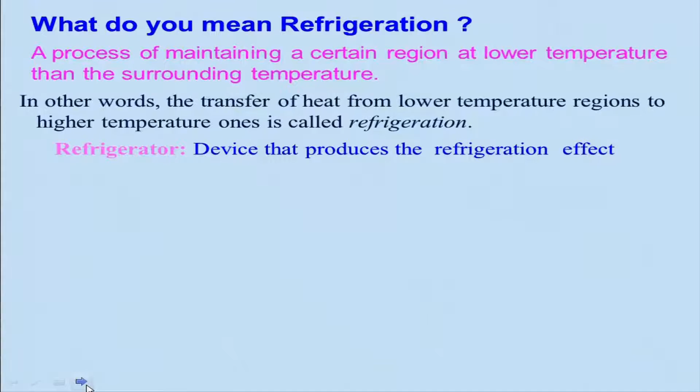In other words, basically what is being done here, the heat is being transferred from the lower temperature region to the higher temperature region. Of course, you need to provide some amount of work, and when we do that, we call it as refrigeration. Basically, if you look at a refrigerator, it is a device that produces the refrigeration effect or the cooling effect, you can say that way.

And air conditioning is a little different. It is not only producing the cooling effect, but it also conditions the air, meaning the quality of the air has to be controlled. So we will be discussing about basically the refrigeration cycle, the cycle which is used for analyzing or for the refrigeration system. We call it a refrigeration cycle. In other words, basically the refrigeration system operates on this cycle, right?

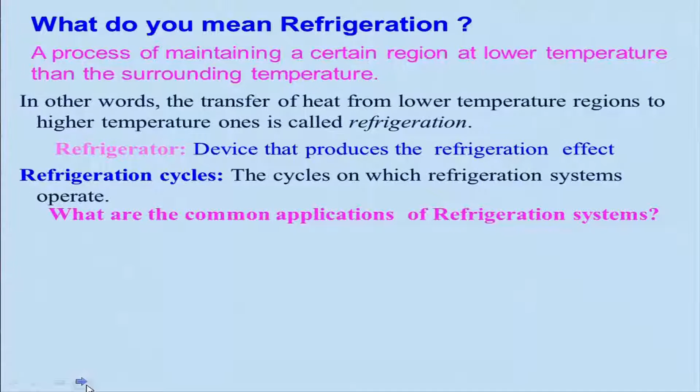So if you look at what are the common applications of refrigeration systems, as I told you, the air conditioning systems and refrigerators we use for cooling the food and other materials which easily get spoiled, and other things we use in factories. You might have seen on the way to our academic campus that there is a liquid nitrogen plant and liquid hydrogen plant. They also use the refrigeration system, and I would suggest you go and check what is happening there and what is being covered in the class.

So if you look at the common applications of refrigeration systems, they are refrigerators, air conditioners, heat pumps, and gas separators. We want to separate the gas, let's say from air, I want to separate nitrogen or oxygen. I can go for low temperature, convert into liquid, and then separate. Ice production is a very age-old thing, right? And liquefaction of gases, we do that. For example, we use liquid hydrogen and liquid oxygen in our spacecraft, rocket engines, cryogenic engines. So in several other places we can use that. It's a very important application.

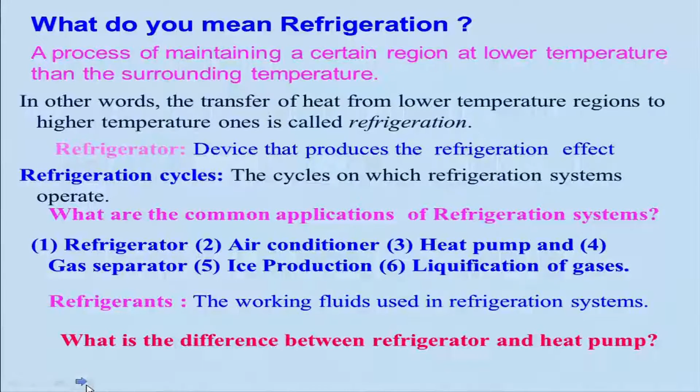So if you look at what is the difference between the refrigerator and heat pump, if you recall, we had already discussed about it. Basically, a refrigerator will be taking the heat from the cold region and giving it to the hot region, whereas it is the other way around for the heat pump. The heat pump will be taking the heat from the cold region and giving it to the hot region, like in winter we use the heat pump.

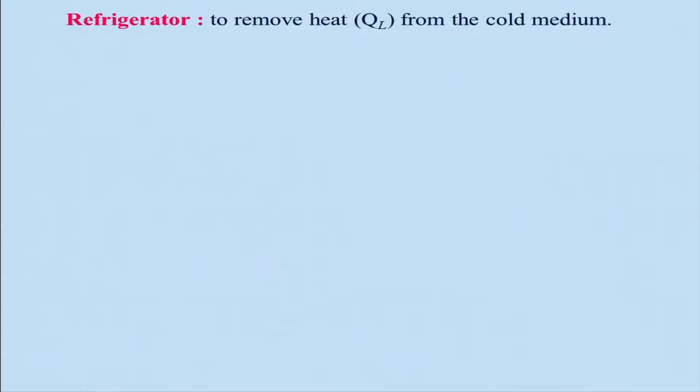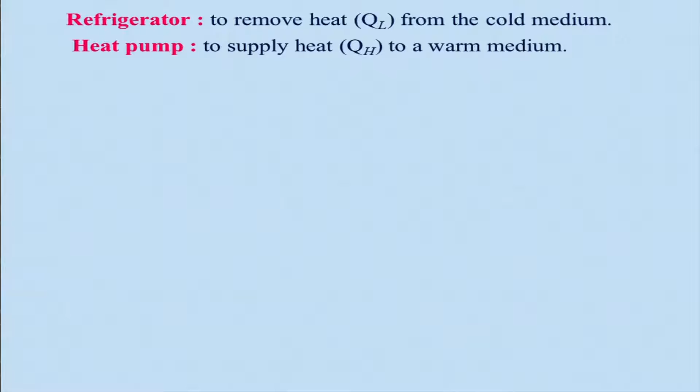As I told you, the refrigerator is basically to remove the heat QL from the cold medium or cold region, and the heat pump is to supply heat to the warm region. Because in winter we use it, and that is warm, we will be giving some heat to the warm region. If you look at this diagram schematically shown here, in the cold region, refrigerated space, we take some amount of heat QL, which is the desired output, then we give some work input, and we reject QH amount to the warm region in case of refrigerator.

Whereas the heat pump is the other way around: it takes a certain amount of heat QL from the cold region, and it supplies the QH amount of heat to the warm region, which needs to be maintained properly in the winter season. And of course, you will have to give some work input to the heat pump.

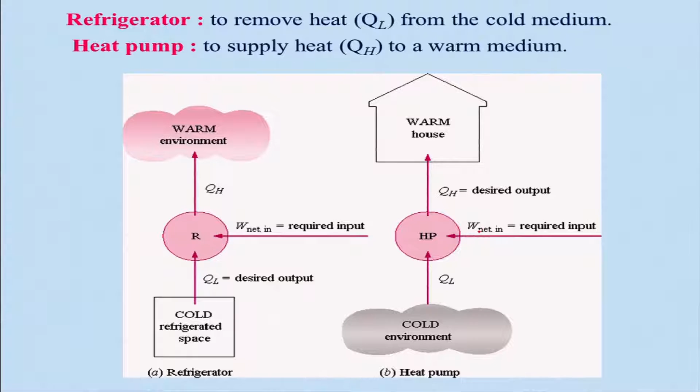How do we characterize the performance of refrigerator and heat pump? In case of the heat engine, we use thermal efficiency, or we can also use the second law efficiency, just to check how good or bad it is, or what are the other scopes for enhancing the thermal efficiency of a heat engine. But in this case, we will be using the coefficient of performance.

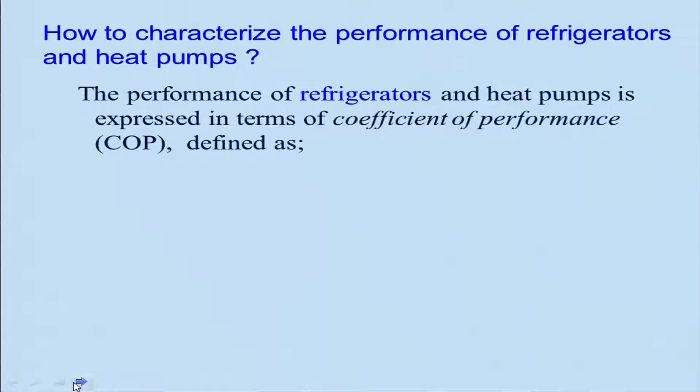The coefficient of performance for the refrigerator is nothing but your cooling effect divided by the work input. And if you look at this, the net work input will basically be QH minus QL.

Similarly, for the heat pump, it is the other way around. We take the heating effect, that is nothing but your QH, and net work done - that ratio, the coefficient of performance for the heat pump, is the ratio of the heating effect divided by the work input.

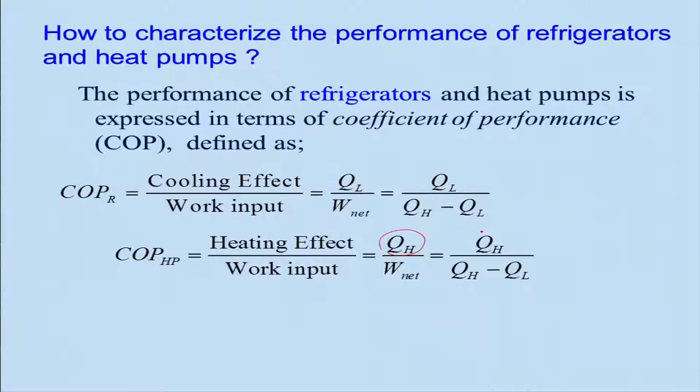If you look at the difference between the refrigerator and the heat pump, in one case the desired effect in case of refrigerator is the cooling effect QL, and for the heat pump the desired effect is the heating effect, that is QH.

So what we will do is look at our Carnot cycle in a reverse way. In this case, what is done is that you compress the fluid coming from the evaporator, and then you condense and reject QH amount of it to the hot region. Then the refrigerant will pass to the turbine where it will be expanded, and then it will go to the evaporator where it will absorb a certain amount of heat from the cold region. So if you look at this, this is basically your cold region.

Keep in mind that we don't really use the turbine, but here I'm just saying it is expansion. In a real situation we will be using basically what we call capillary tubes or the throttling valves, which we have already discussed. Let us look at here what is happening.

If you look at this, 1 to 2 is your compression - this is two-phase flow kind of thing. 2 to 3 is your heat rejection in the condenser, and 3 to 4 is your expansion. We are considering isentropic expansion from 3 to 4, and then 4 to 1 is heat being taken from the cold region by the evaporator kind of thing.

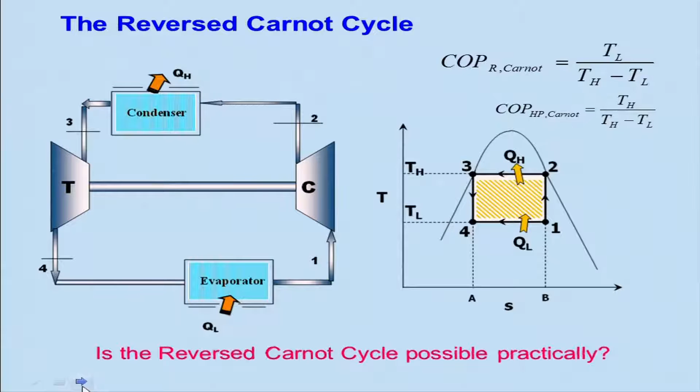As I told, the reverse Carnot cycle is not really possible practically. So we will have to change the components or the process so that it can be implemented easily. As I mentioned earlier, the turbine can be replaced by a throttling valve, and we use a capillary tube in case of refrigerators and other devices.

So in the ideal vapor compression refrigeration cycle, we basically compress the vapor, and once it passes through the evaporator, it becomes vapor, and ideally we can say it is at saturated vapor condition. Then you compress it isentropically to state 2, and then heat is rejected in the condenser, that is condenser process 2 to 3, it is rejected to the warm environment, and that is QH.

After that, process 3 to 4 dash is isentropic expansion. However, in the real situation it will be an isenthalpic process, that is 3 to 4, which actually takes place. So this is the ideal vapor compression cycle.

If you compare the ideal vapor compression refrigeration cycle with the Carnot cycle, the heat rejection process 2 to 3 is the same constant temperature heat rejection. The only difference is that we have superheated vapor at station 2, and then it comes to saturated condition. In that region the temperature remains constant, but it is an isobaric heat rejection, meaning the pressure remains constant.

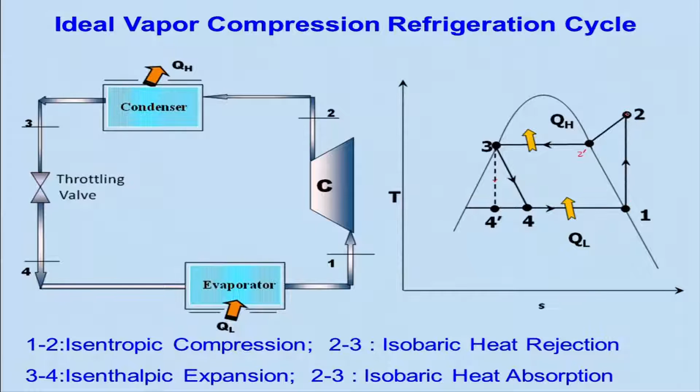That is the difference, whereas in case of the Carnot engine, 3 to 4 dash is an isentropic process, and 1 to 2 is also isentropic compression, but there it is basically two-phase fluid to saturated vapor condition. In case of the refrigeration system, it goes from saturated vapor to superheated vapor state during isentropic compression.

If you look at the same thing on the P-H diagram, it will be very clear. The process 3 to 4 is basically isenthalpic expansion.

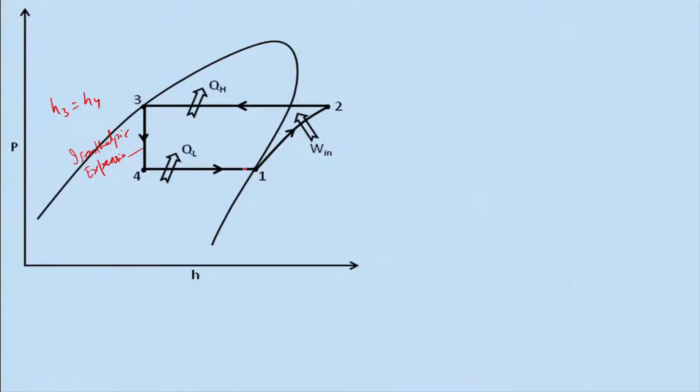This is because H3 is equal to H4. The process 2 to 3 is the heat rejection QH, which is constant pressure heat rejection, process 1 to 2 is isentropic compression, and 4 to 1 is again isobaric heat absorption. So we can analyze this.

We will use the first law of thermodynamics. We know QL for the process 4 to 1 is nothing but H1 minus H4, using the same assumptions: steady flow process, change in kinetic energy is zero, change in potential energy is zero, and there is no shaft work in this case.

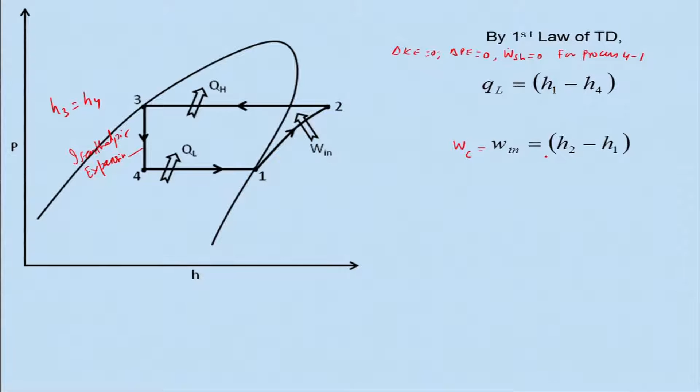So for process 4 to 1, using the steady flow energy equation, QL is equal to H1 minus H4. Similarly, we get the compressor work input, WC, which is work input to the compressor, equal to H2 minus H1.

And the COP of refrigeration is QL divided by WC, that is the work input to the compressor, which equals H1 minus H4 divided by H2 minus H1.

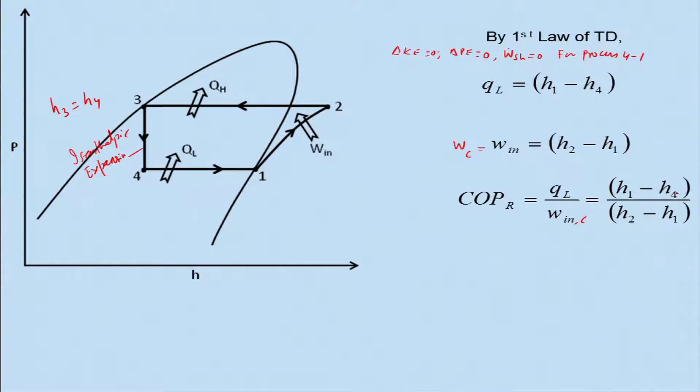And we have seen that there is no work being produced by the expansion process because of the throttling process. H3 is equal to H4.

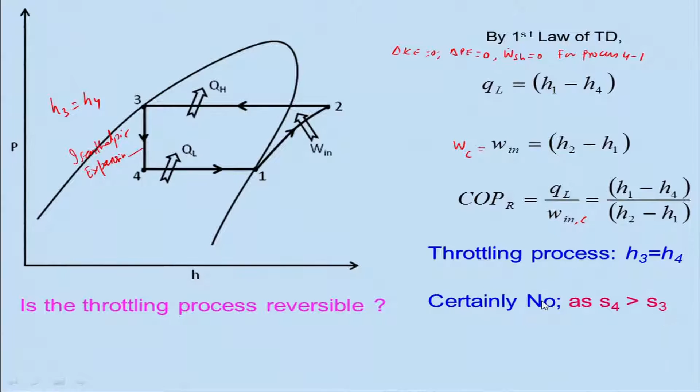And the question is, is this throttling process reversible? Certainly not. We have already seen that entropy is increasing during the throttling process, since S4 is greater than S3, so it is an irreversible process. But for the reversible process, S4 dash is equal to S3, as we have seen, though you cannot see that in the PH diagram and TS diagram.

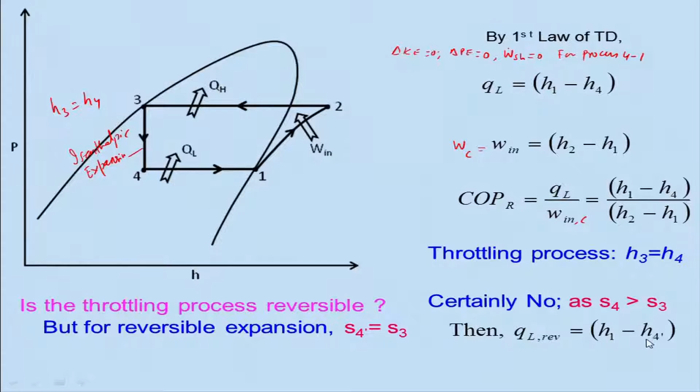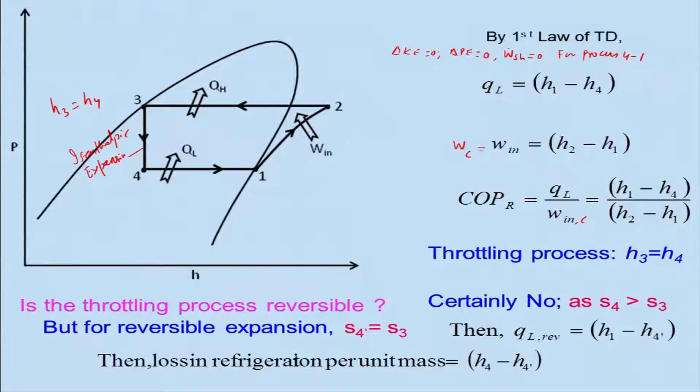Therefore the amount of heat absorbed during the reversible process is equal to H1 minus H4 dash. This will be higher compared to the irreversible throttling process. So the loss in refrigeration per unit mass will be H4 minus H4 dash, which is the loss in refrigeration per unit mass due to the isenthalpic process in a throttling valve or capillary tube.

So the question arises, how to choose a refrigerant? We need to look at the properties it should have. For example, can I use water as a refrigerant? Can I use air as a refrigerant? These are two fluids we are very familiar with, and yes they can be used. We'll see later that air is used as a refrigerant, particularly for aircraft applications.

For a refrigerant, the boiling point must be lower than the temperature of the evaporator, because otherwise you cannot really absorb the heat.

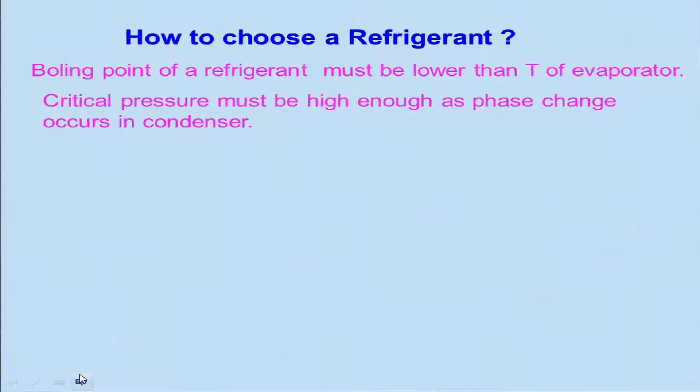And the critical pressure must be high enough such that the phase change occurs in the condenser, because heat rejection is very important there. Suppose the refrigerant's critical pressure is very low, then it cannot change phase and will remain in the vapor state, so particularly for the vapor compression cycle, you cannot use it.

And it must be non-toxic and non-corrosive also, because it will be passing through the various components. If it is corrosive, it will erode the material, and the life of the refrigeration system will be very low.

And it will be non-flammable, because if there is a leakage, there will be a problem of getting burnt or fire. So it should be non-flammable, and cheaper, among other properties. It must also remain chemically stable while undergoing the cycle, since various processes like evaporation and condensation are taking place. If it changes its chemical properties, it will be problematic and lose its refrigeration properties.

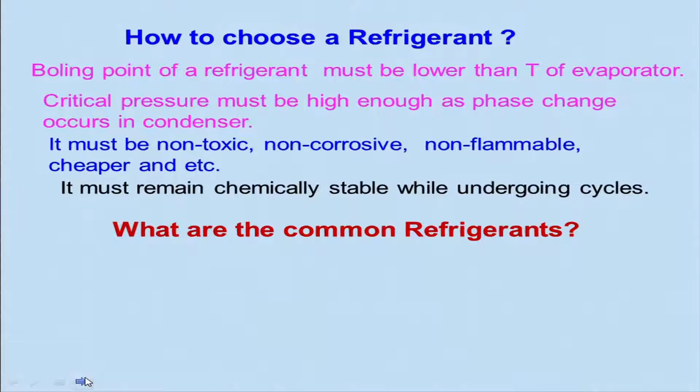So what are the common refrigerants? There are several of them, but I will discuss only a few. The oldest refrigerant is ethyl ether, which evaporates very easily and cools down. Later on, ammonia, methyl chloride, ethyl chloride, sulfur dioxide, and several others were used.

Ammonia, although toxic in nature, is very much preferred in industrial applications because it has a higher COP, coefficient of performance, so the cost will be lower. One can also use hydrocarbons like propane, butane, gasoline, ethane, and ethylene as refrigerants, but those are not commonly used because most of them are flammable.

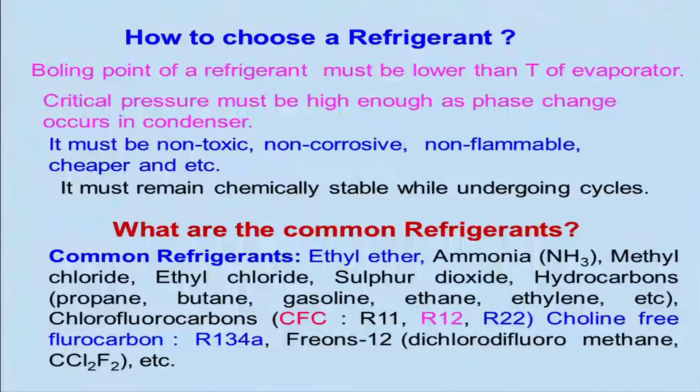That is being banned across the world, and nowadays people are going for chlorine-free fluorocarbons like R134A, tetrafluoroethane. There are other varieties like Freon 12, dichlorodifluoromethane, and others being used. Nowadays people are basically using R134A, and there are several variants sold in various places under different names. There is an urgent need for developing refrigerants which will be benign and also serve the purpose, not spoiling the ozone layer or causing pollution. This is an important area of research.

We will take an example to illustrate how to calculate this. In an ideal vapor compression refrigeration cycle, 1.2 kg per second of tetrafluoroethane, R134A, is used as a refrigerant to maintain a cold region of minus 8 degrees Celsius. Its saturated vapor enters the compressor at minus 10 degrees Celsius and leaves the condenser at 40 degrees Celsius. We need to determine the compressor work, the refrigeration capacity, and the COP of this ideal cycle.

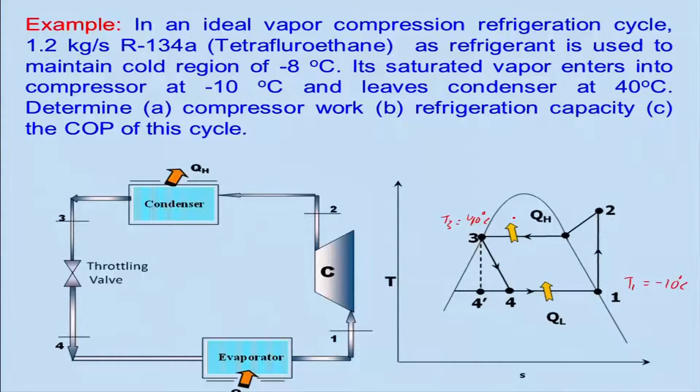This is operating at minus 8 degrees Celsius, the cold region being maintained. The saturated vapor enters the compressor at T1 equals minus 10 degrees Celsius, and leaves the condenser at state 3, which is T3 equals 40 degrees Celsius. So what we will do is use the refrigerant table to get these properties and solve this problem.

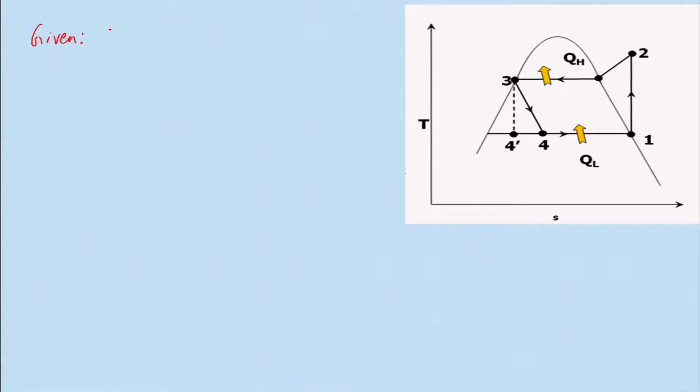So the given data: T1 is minus 10 degrees Celsius, T3 is 40 degrees Celsius, and the mass flow rate of the refrigerant is 1.2 kg per second. We need to find the work done by the compressor, the refrigeration capacity QL, and the COP of the cycle.

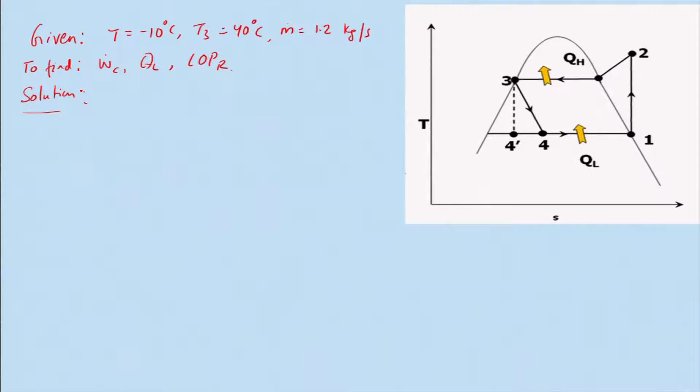So we will look at the R134A refrigerant table corresponding to minus 10 degrees Celsius. At the saturated vapor line, we get H1 equals Hg equals 392.2 kilojoule per kg, and Sg equals S1 equals 1.7319 kilojoule per kg Kelvin. The saturated pressure P1 is 201.7 kilopascal.

Similarly, at 40 degrees Celsius, we get this data: P3 is 1017 kilopascal, and HF equals H3 equals 256.54 kilojoule per kg, and S3 equals SF equals 1.1909 kilojoule per kg Kelvin. And Sg is 1.7223 kilojoule per kg Kelvin.

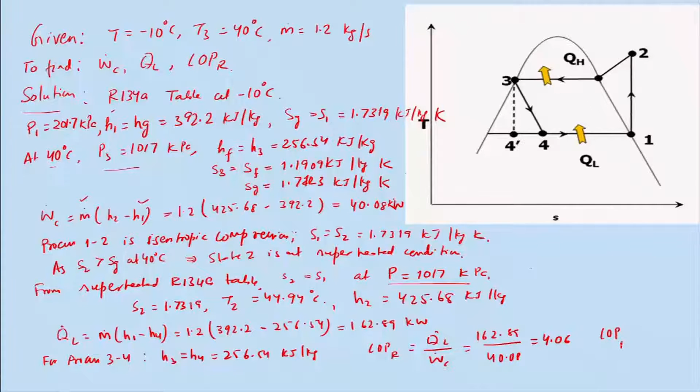But if you consider between these two temperatures, the reverse Carnot cycle, then we will get the COP of Carnot is equal to TL over TH minus TL, which is equal to 263 divided by 50, and that is equal to 5.26. So you can note from here that the COP of the Carnot refrigeration cycle is greater than the COP of the ideal vapor compression cycle.

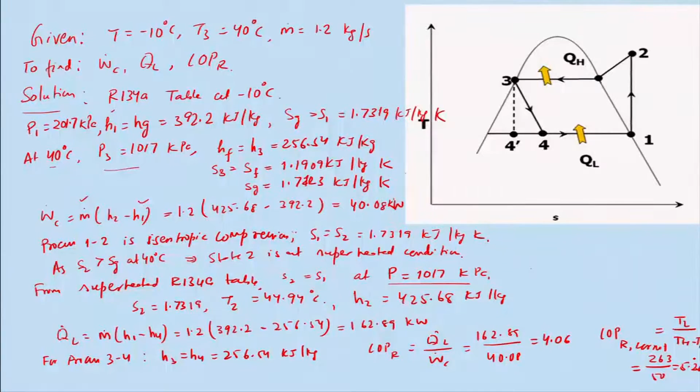So by this one can really learn how to calculate and how to do that. And let us now discuss about the actual vapor compression refrigeration cycle.

Earlier we had discussed the ideal vapor compression refrigeration cycle, assuming the processes in the compressor to be isentropic in nature, and during heat rejection we considered isobaric process, and heat absorption also isobaric process in case of ideal refrigeration cycle, but that won't be possible in actual situation.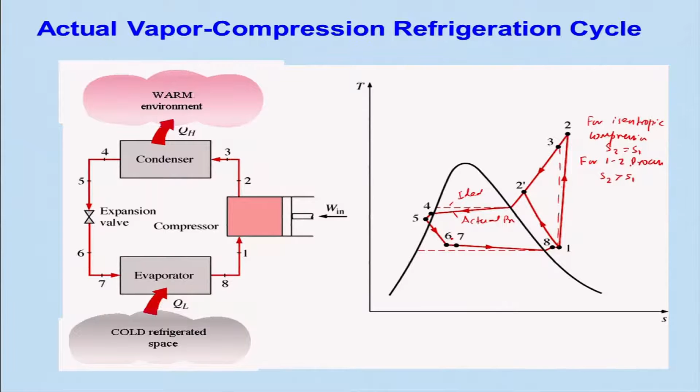As told earlier, there will be a pressure change in the evaporator also, so the process is extended a bit from S6 to S7. What is happening here is that you have to give more work input to the compressor, and the cooling effect is also reduced. As a result, COP will be lower in the actual vapor compression refrigeration cycle compared to the ideal one, which is expected. We have also seen in the case of heat engines that thermal efficiency of the actual cycle is lower than the ideal cycle.

So let us look at a household refrigerator system.

This is your compressor, which is shown here - a hermetically sealed compressor which people use, and there is a condenser coil. If you look at very old refrigerator systems, the coil is not covered; nowadays they cover it. If you put your hand on it, it is very hot, you might have observed. Going back to the side, there are a lot of tubes, and because of this, pressure losses will be there.

And this is your capillary tube, what we call the throttling valve or expansion valve - a very simple hypodermic tube, small diameter, very simple, placed close to the evaporator coil which remains in your freezer compartment. That is maintained around minus 18 degrees Celsius, from where heat is absorbed and then passed through. The other places are maintained around 3 degrees Celsius in household refrigerators - not like other refrigerators where low temperature is used for keeping ice cream. Therefore it's important to keep ice cream and similar things in the freezer compartment, otherwise they will melt.

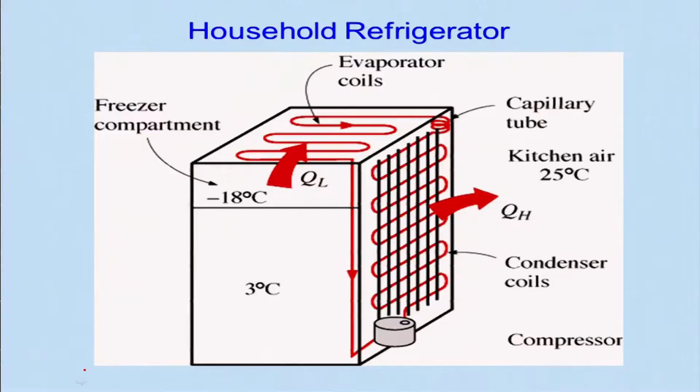So this is the typical kind of setup being used. Of course, liquefaction systems and similar applications require much lower temperatures, which may not be achievable with the same refrigerant. You may use different refrigerants together in what is known as a cascading refrigeration system, which we won't be discussing here, but if you're interested, you can look it up.

As I mentioned, this air conditioner can also be used for heating in the winter season as a heat pump, because all the systems are similar. If you look at it, there's an expansion valve, a compressor, an indoor coil, and an outdoor coil. This outdoor coil will sometimes act as a condenser and sometimes as an evaporator - you just change the mode.

In this case, what is happening is we are using this as a heating mode - taking the indoor unit fixed in the room. The refrigerant is compressed here, becoming higher temperature, so it gives off heat here, QH. Then it goes and expands, becoming lower temperature, and goes back to absorb heat from outside, QL. Then it goes back to compress again - this is the heat pump mode.

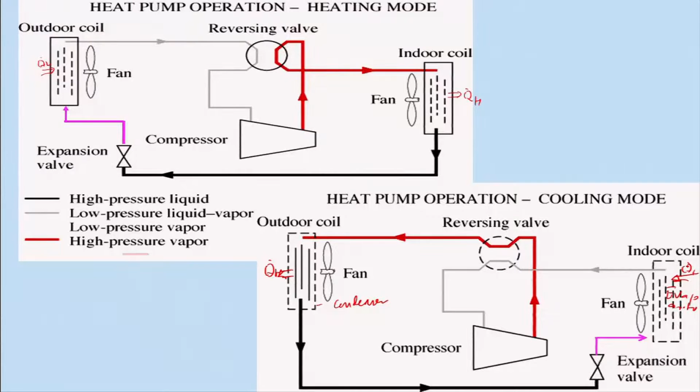And again, after that it will go to the compressor, and it will compress, and the cycle is complete. This will be acting like an evaporator, taking heat from here, QL amount. So you just use this reversing valve, and you can operate your air cooler as a heat pump in the winter season and air cooler in the summer season. This is a very simple technique which is being used, one can go for it.

So we have looked at these vapor compression cycles. Of course, there is a vapor absorption cycle which we have not discussed, but there is a simple gas refrigeration cycle which is being used, which will be using the gas, not the vapor.

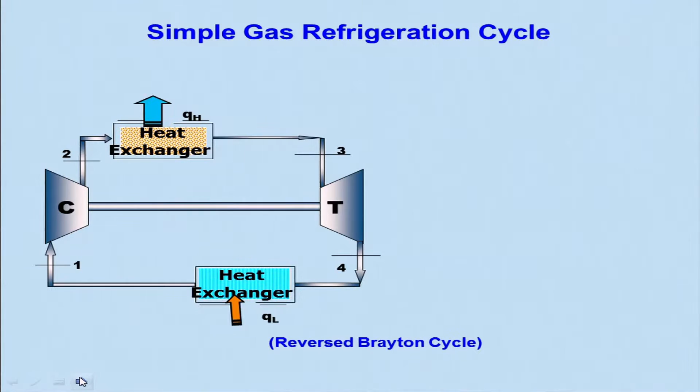And in this case, what is happening? It will be compressed from 1 to 2, and there will be a heat exchanger where heat will be going out, then it will be expanded in the turbine, and then in the heat exchanger that amount of heat will be taken from the cold region, and heat is rejected. If you look at the processes, this one is known as the reverse Brayton cycle. We have already looked at the Brayton cycle for generating power - it is just the opposite of that.

If you look at the 1 to 2 process, it is basically isentropic compression, and 2 to 3 process is heat rejection, and 3 to 4 is again isentropic expansion in the turbine, and 4 to 1 is your heat absorption from the cold medium. As a result, we are just reversing the other way around and using that.

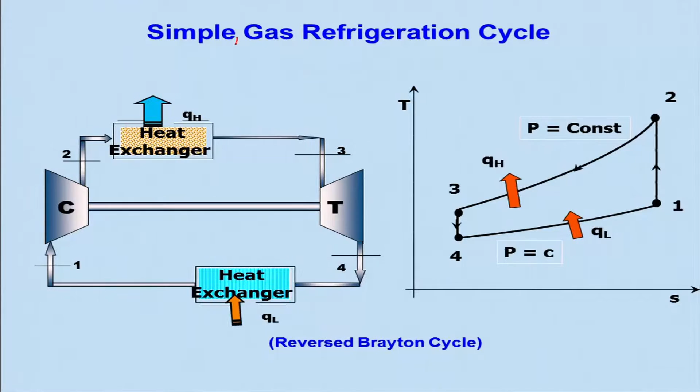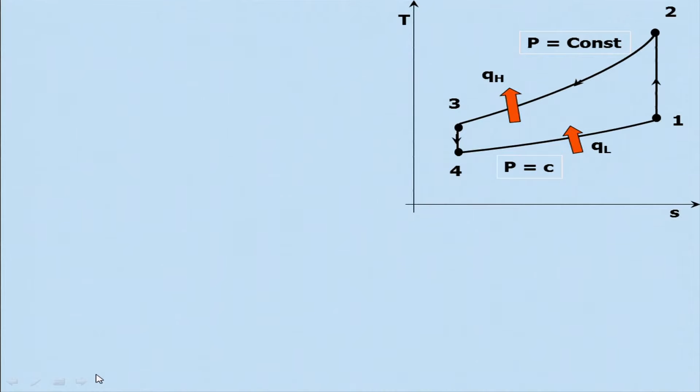So this is the ideal gas refrigeration cycle. We will be discussing the ideal, simple gas refrigeration. There is also complexity involved in it which we won't be discussing. So what we are looking at here is basically the ideal reverse Brayton cycle, and we need to analyze it, applying the first law of thermodynamics for each component.

For example, for the process 4 to 1, where heat will be absorbed, that is QL, which is nothing but equal to H1 minus H4. We will be making the same assumption - steady flow process in this case, and change in kinetic energy is 0, change in potential energy is 0. So therefore QL will be equal to H1 minus H4.

Similarly, QH will be equal to H2 minus H3 - the same thing.

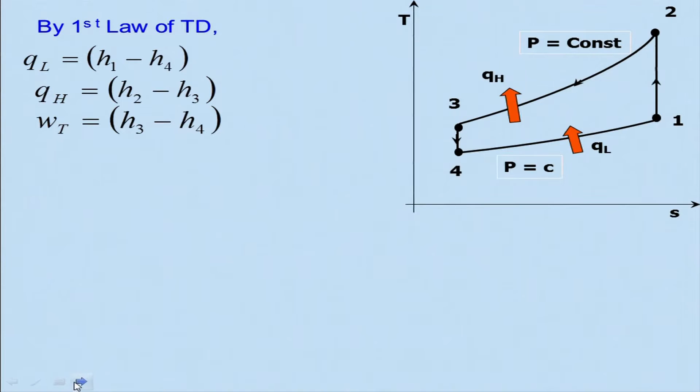And the work is basically by the turbine. The turbine is producing some work, H3 minus H4, and the compressor is H2 minus H1. The net work will be WC minus WT, which is equal to H2 minus H1 minus H3 minus H4.

If you look at the COP, coefficient of performance, it is nothing but QL divided by W net. We are assuming that Cp remains constant, therefore we can express this enthalpy in terms of temperature. In actual situations it won't be constant, but for our assumption we are saying Cp is constant, not changing with respect to temperature. This is ideal we are taking, and ideal gas also we are assuming.

So therefore it becomes T1 - the coefficient of performance of this gas refrigerator will become T1 minus T4 divided by T2 minus T1 minus the bracket T3 minus T4. If you look at this, COP of gas refrigeration will be less than the COP of vapor compression refrigeration cycle. You can do a simple calculation and see that whenever it is operating between two temperatures, this will be lower.

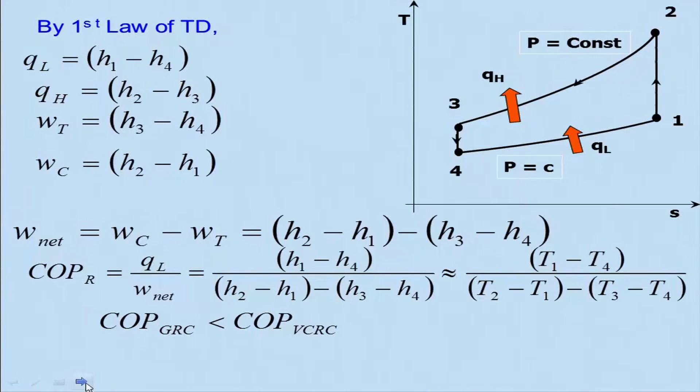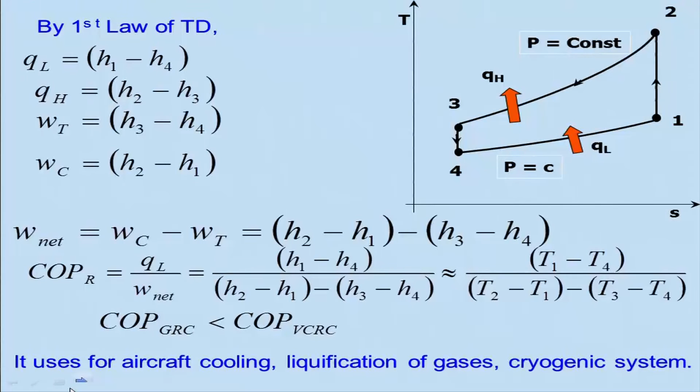So it is used for aircraft cooling, liquefaction of gases, and cryogenic systems - don't think that this is so simple, these cycles. There will be varieties or complexities involved, in the sense regenerative and other things are being used so that COP can be enhanced.

So we have given you an overall view of the refrigeration cycle kind of things, and we will stop over here. We will be discussing in the next lecture basically about how to handle these mixtures and how to handle the properties of air, because we will be looking at air conditioning. So we will learn that. Thank you very much.